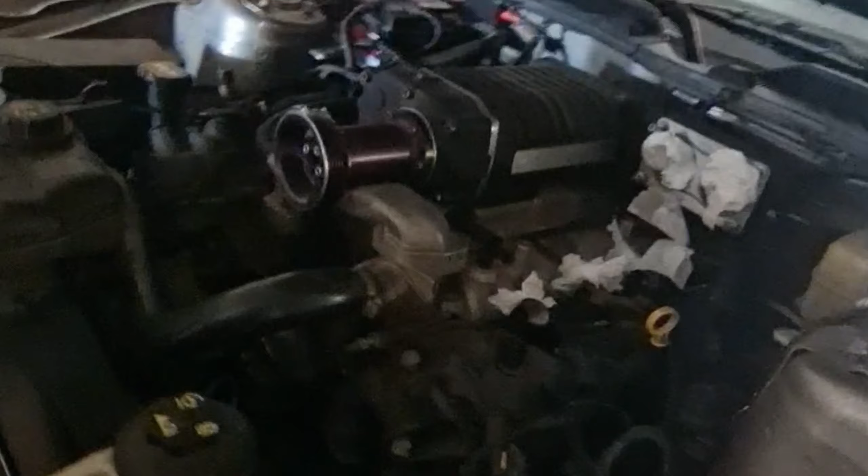Time to remove everything. No, no, no.

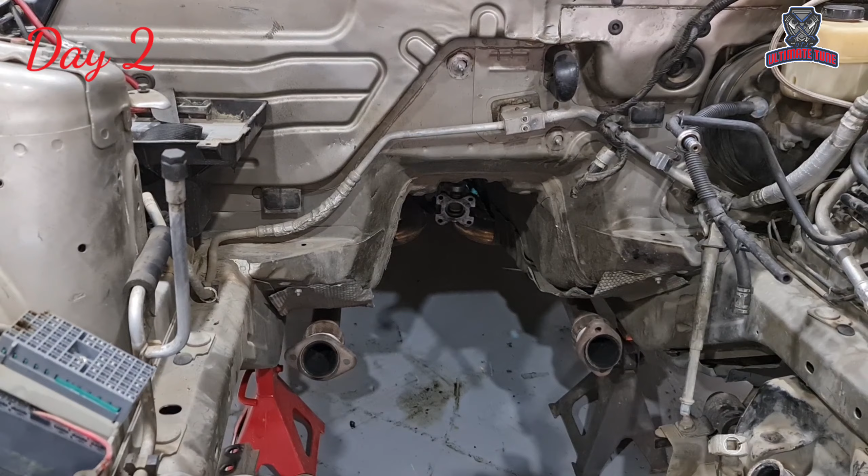Clearing out everything. It's gonna be a challenge with the gas line, with the AC line. But so far everything looks good. We have the interior dash completely taken out. Someone locked the door. It's all out. Here we have the engine.

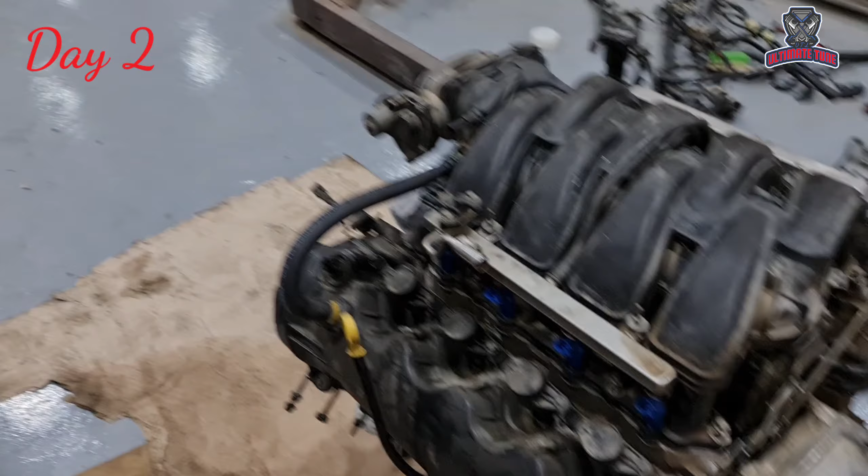Everything is under control. So this is the harness which is gonna fit in the car, and here's the old dash coming out. Of course the steering column shouldn't be taken out and we keep it in.

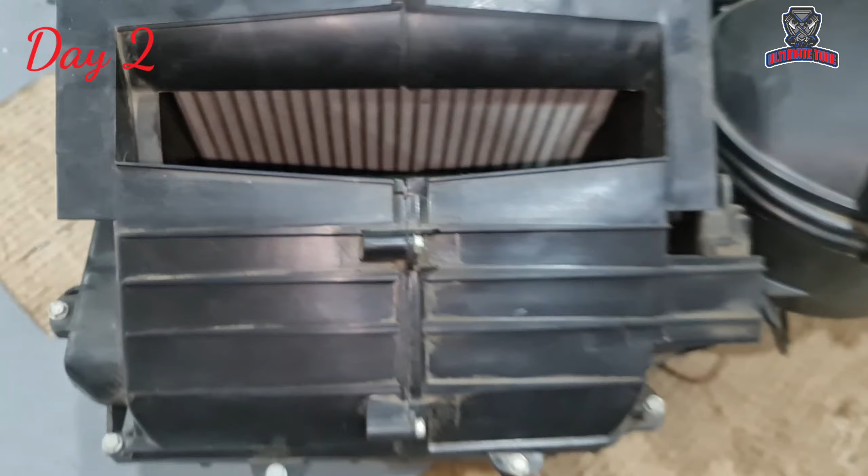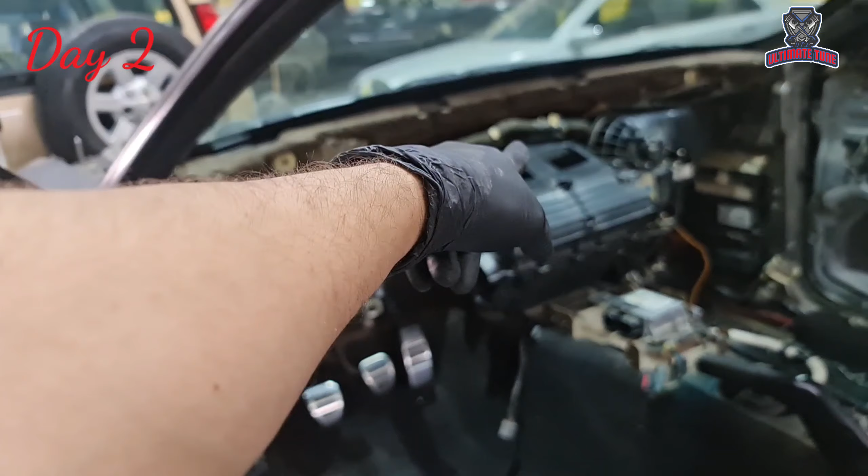So the throttle pedal fits perfectly. Of course, this is why you need the harness, because the plug is completely different from the 4.6 to the 5.0 Coyote engine. The cooling system should fit. Everything from the internal side is fine.

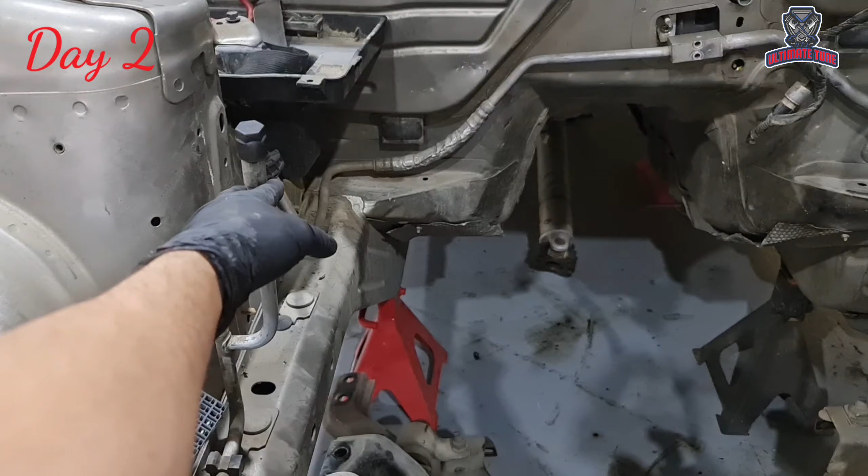Of course, this is where we remove the smart junction box, the body control, the harness, everything, and put the one from the Coyote. But from the outside, we have the challenge that this part is completely different. So I think we will need the piping from the other car, which is the Coyote 11 up.

And as of that, we might need to cut a little bit at this area, which is fine, because this area we can seal with something and then it's all good.

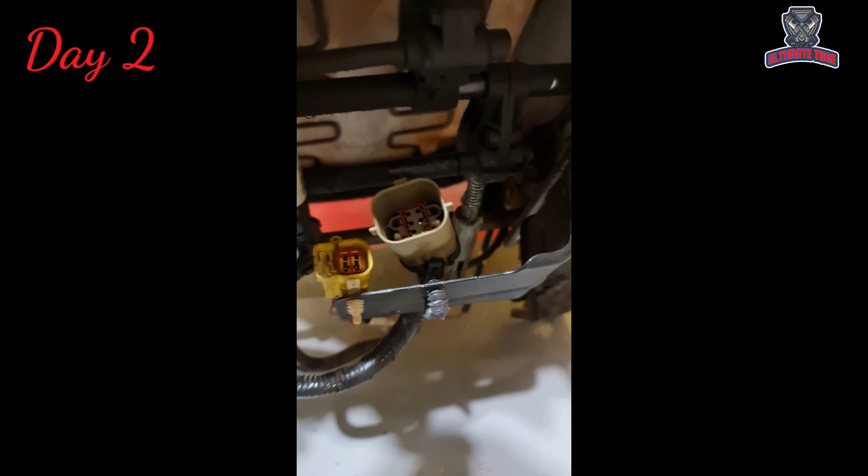So this is the driver's seat, and the main plug which fits on the main harness is different. So therefore you need to change the complete harness of the seat, which is not so complicated. All you need is the donor car seat, so you just take the harness from there. The passenger side is fine, you can just plug it and use it.

Look guys, the Mustang steering system is the easiest to turn. Look how easy it is. So smooth.

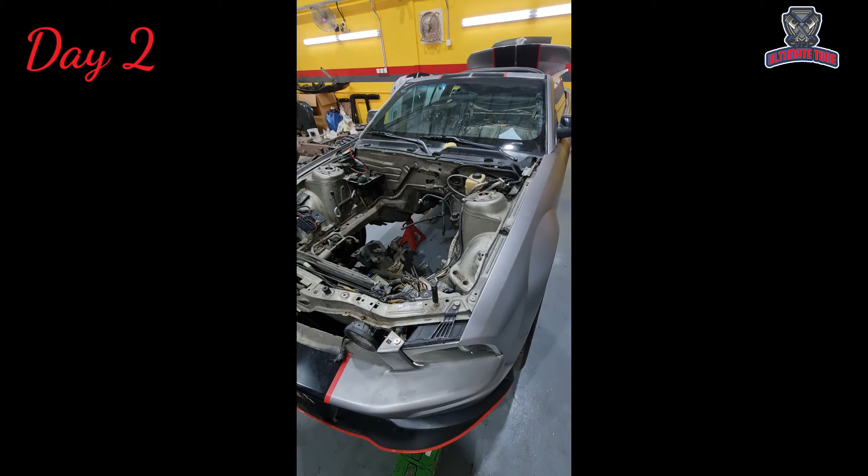There is nothing. So at this stage, yeah, the remote system, the most attractive thing in my Mustang. So many people ask me for that. Okay, remote start system is gone, new one is coming in.

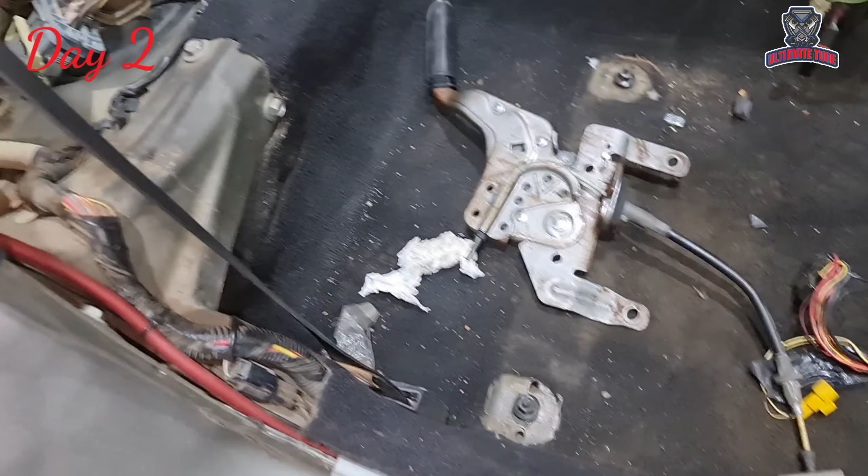So at this step now, we'll be taking off all the harnesses of this interior. It's gonna be all coming out all the way to the back, and then we put the new one after some care. I don't like to keep these things like that. I mean, even the original, you can see how it is, but I'll try my best to make it as good as new, better than new. This is the target, better than new.

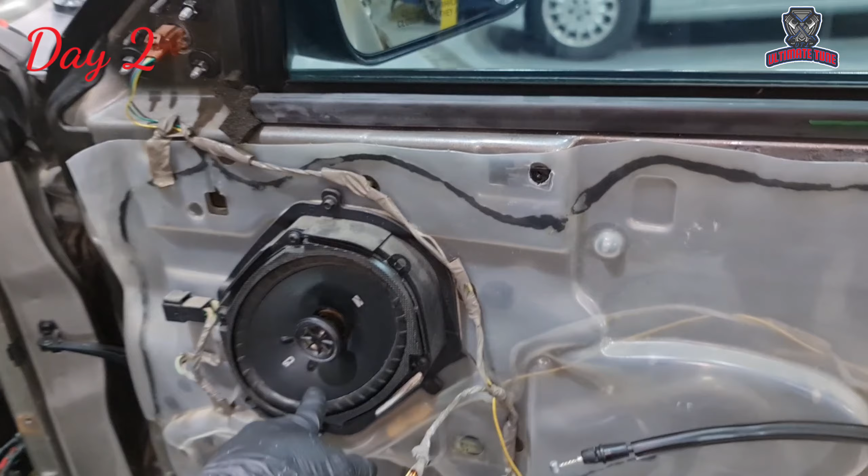Kickers, I love these speakers. They are so good.

Will it be possible to work with my Mustang without getting dirty? No way. Here's the progress. All the cables from the backside are out. Now we are coming to this stage. All the cables will come out, and then we will start with the new one.

Before going deep with the wiring and the harnesses and everything, I need to explain some important information about what I would call the nerve system of the Mustang, which is the harness and the different harnesses. There is an online website where you can find all the wiring diagrams and technical information for the Mustang S197, and for the S550 I already shared everything on my Dropbox link. This resource is very important for you to check and follow up.

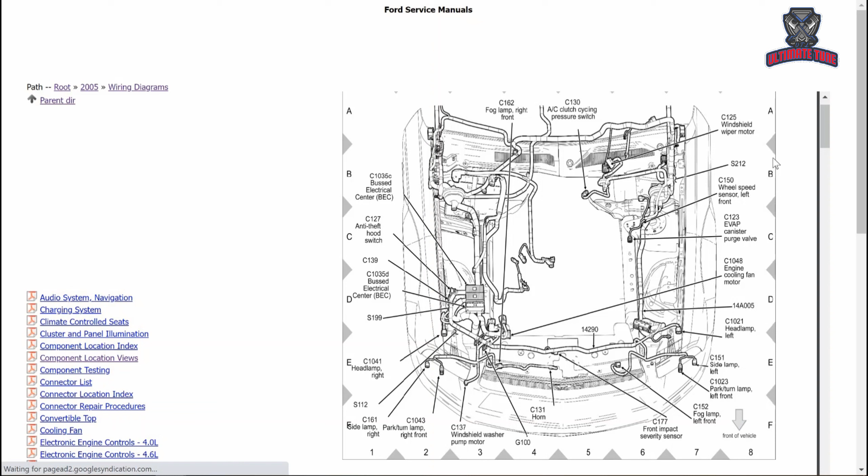For my own convenience, I'm using an offline copy of it, which I got used to. This is the older one and it has the same information. So 2005 up to 2009, there is one main harness. If you can see, this is the big one, which is going all the way from the fuse box in the engine bay all the way back to the tail light.

And then there are different small harnesses, for example for the engine, it depends on the engine you have, the transmission is also part of the engine, and then for the dash there is one, for the door there is one, door internal, and the tail light.

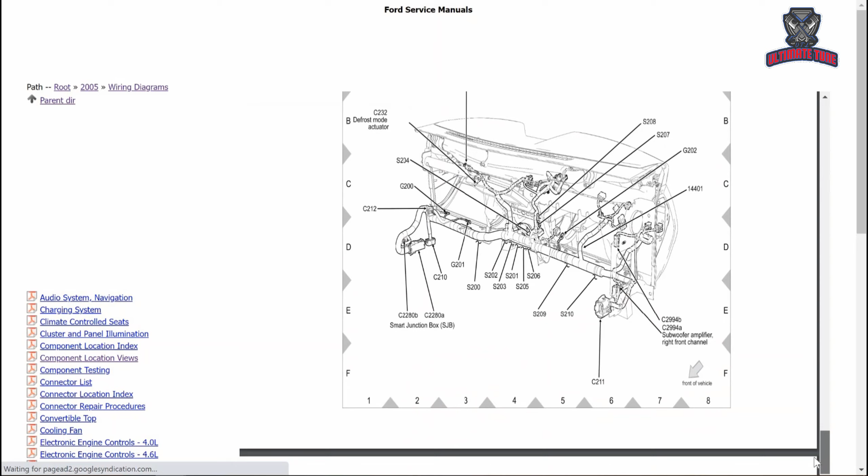As of 2010 and up to 2014, there are actually multiple different harnesses. This is an important difference, so you know how to deal with this. So for example, the fuse box comes with one harness, which is going inside to the smart junction box, and then covering all the way here for the headlight, for different components.

For example, for the MAF sensor, which is a little bit different on the S550, and then also for the ABS control, and then going all the way here to the dash from the driver's side, if I would say correctly.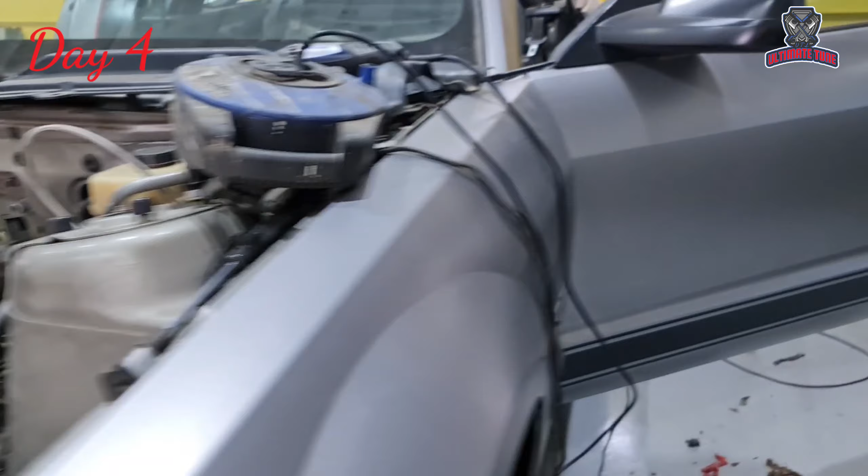Better than original, isn't it guys? As we know, this part needs to be modified. Now the modification, after studying the pipe diagram of the AC system, it's gonna be really easy, even easier than I thought.

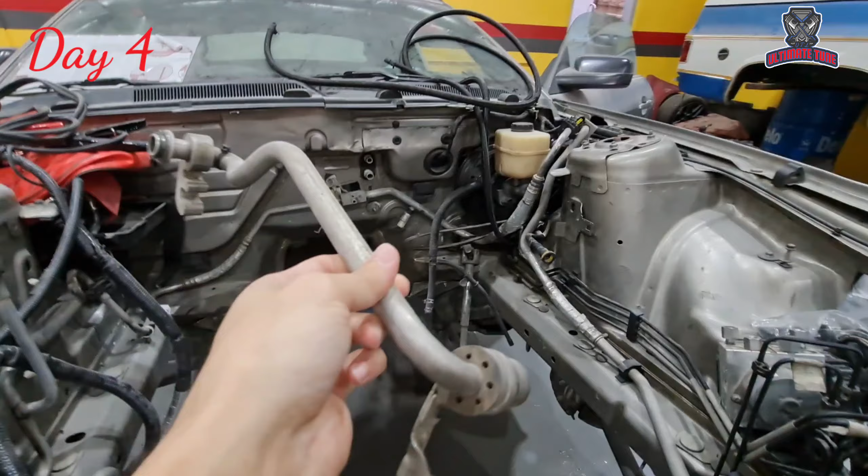So this is one side. I took this from the 2010 because it still has the storage container here. So 2011 and above, both lines go together on this side. So I don't want to change everything and then also change the AC radiator system.

So what I need is just the part of hosing. This will be cut and this sensor will be taken off, it's not needed. This pipe should be connected.

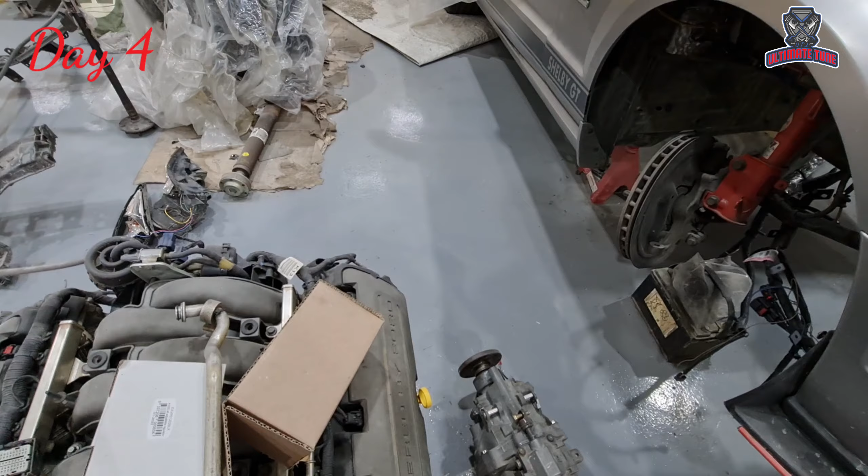And for the other side, I took this completely, but also I don't need it completely. I just need a small part where it fits in and then goes with this pipe.

The guys here in the workshop, they are good enough to do all this work, so everything is fine.

And then for the 5.0 to 2011 plus, here we have the transducer sensor, which is on the same correct line for the 5.0 2011 and above, but for our model it's here. Their model, it should be there at that side, even the plug is there.

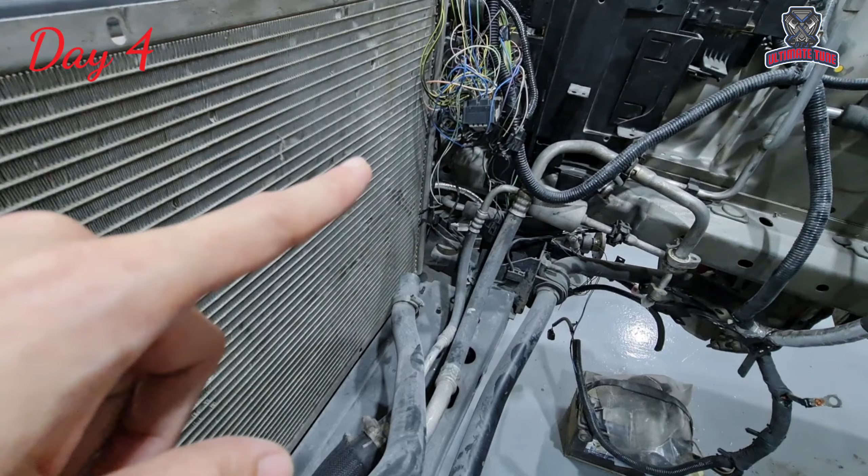So what I'm gonna do is extend that plug all the way here and then put the sensor here, because in the same pressure line, it's not different. And yeah, there is only one sensor, so that's the solution, and that's it.

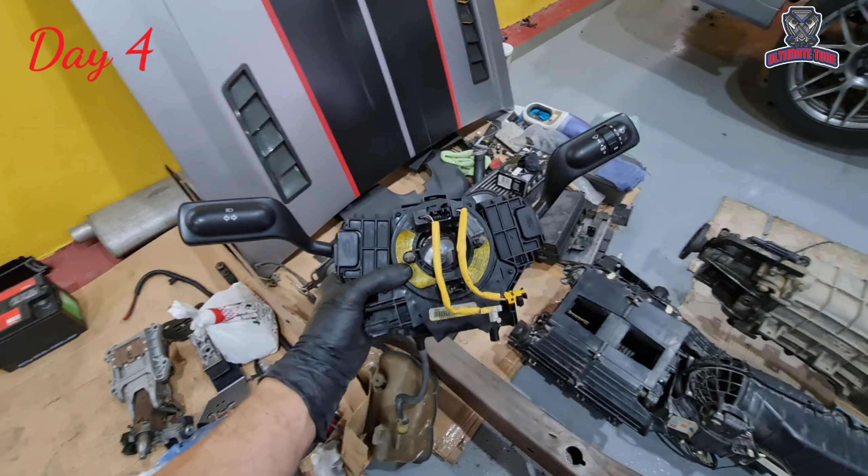Another thing to keep in mind, you want to change this because a few plugs don't match with the new dash. New dash means 2010 and up.

The steering column you can keep because you can keep it for your own key, for your own PATS system. This is the easiest, of course, unless you would like to change your keys. I have to, so no way. And then I'm just changing this one.

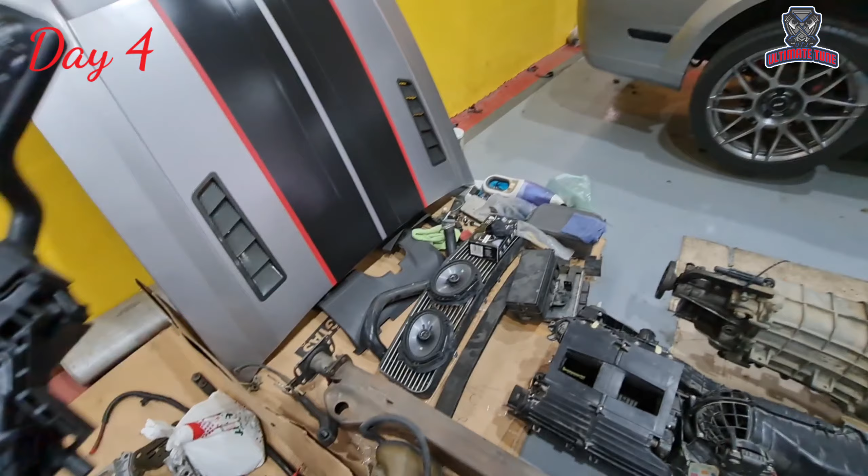Now the secret, where many people asked, how did I manage to get all the wires now, almost I could say 80% are done. How did I manage to put the Shelby steering wheel?

It's actually because the new one has a big plug here, up. Let's go to the light.

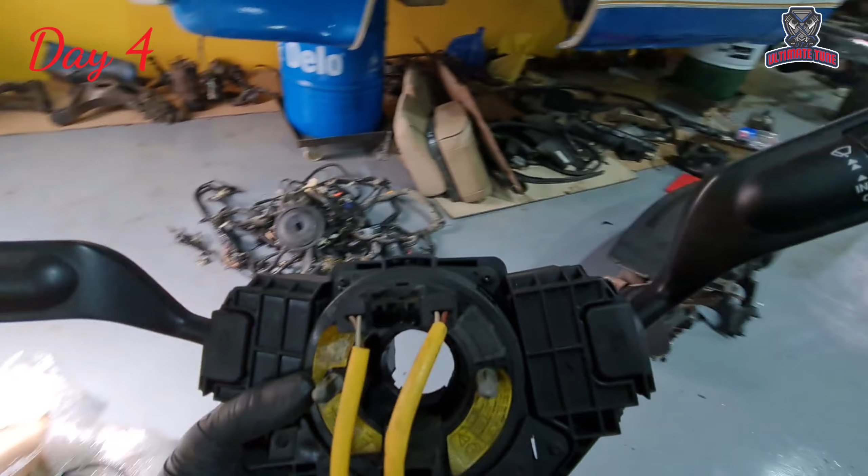Don't look at this. Some old classics, which is amazing. I'm not just saying old classic in a bad way, it's a good way. Yeah, anyhow.

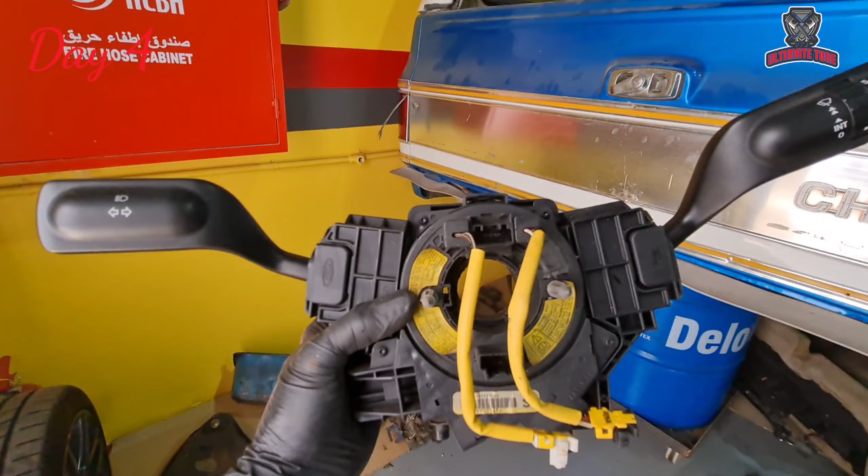This 3G is coming in a few years to be a classic, so now you know why I'm doing all this work, to keep my classic for the future.

So shortly, the upper plug which we have here is one row, and there is another one here which Ford doesn't use. And to use that, you need this plug.

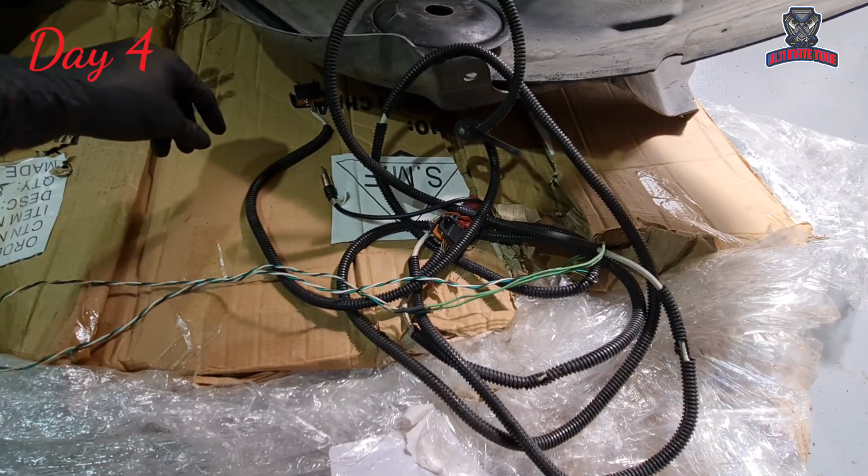You just need this plug, and hopefully you can read the number. Come on, focus. You can see the number. Oh my god, this is too much zoomed in.

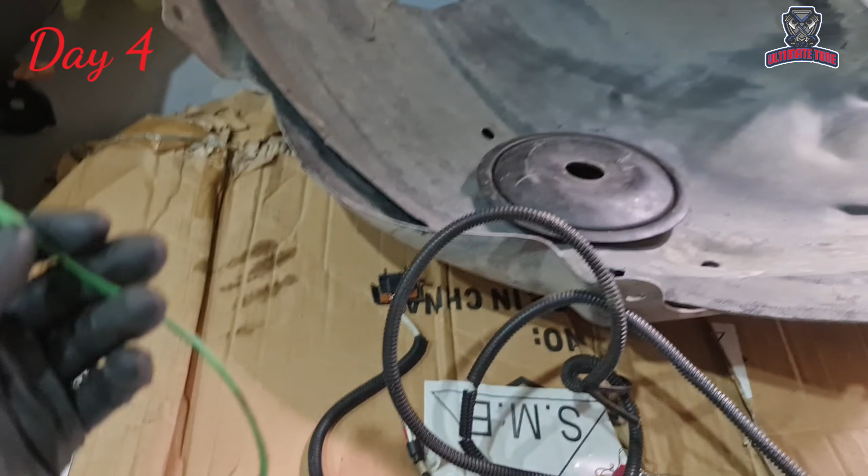Hopefully it's clear, you can find it on the internet or in my Instagram post. Check it, talk to me, I can share with you the part number of this.

Anyhow, you plug this interior one, and then the heading second port, it's here. So you can see this is the second one. So it's communication from the lower one, from the inner one to the lower one, and then to the sound system. So yeah, that was the small trick I did.

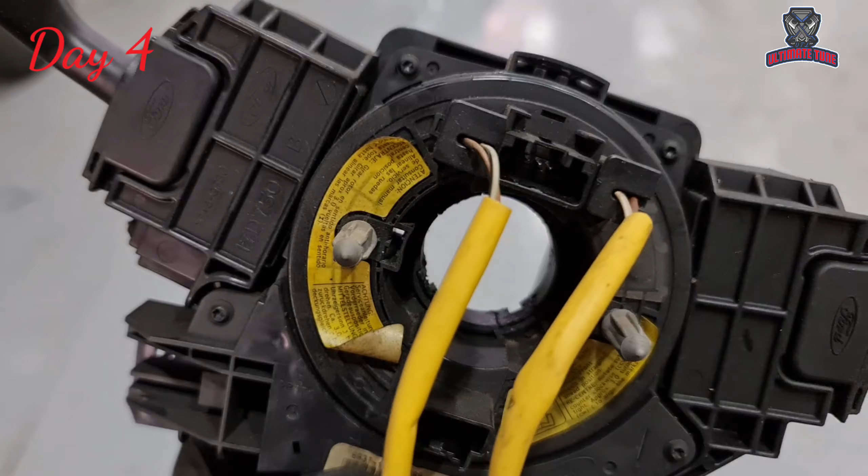So this will be changed. Of course, when changing this, you need to change the cover, because the new one has only left arm, left multifunction control arm, not two sides. So you need to close the other one.

Keep on working. Here's a little story about a hunter guy, he used to be the owner of this Mustang. Imported, and since the beginning - this is not yet my footprint, guys - there was always a noise under my seat about things scrubbing left and right.

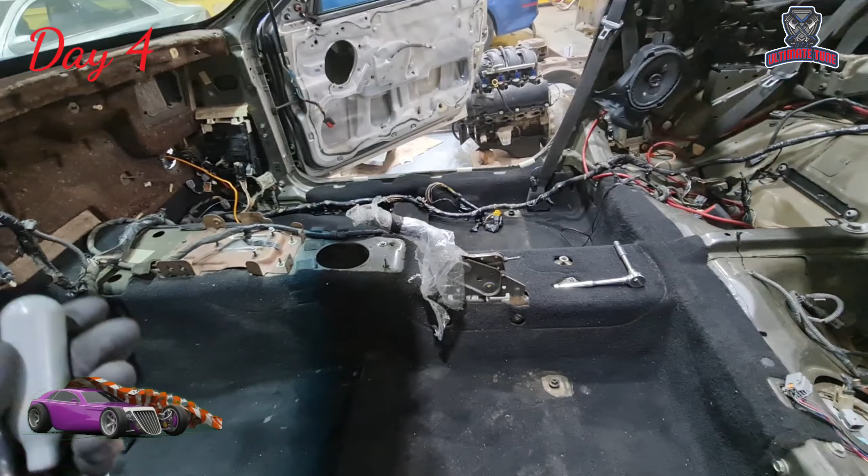So when I bought it, I started discovering, I put a magnetic and started pulling these small pipes, and I found like 40 pieces. Now, after more than 8 years - is it 8? Almost 10 years. Almost 10 years. Yeah, 8 years exactly, yeah. So it was 8 years.

I found another 2, it was exactly under this area. Crazy! Now you know why there is a footprint here.

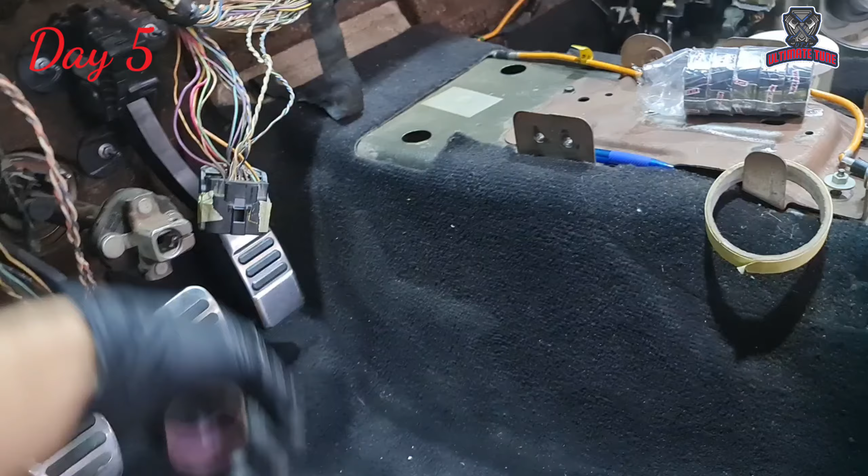What I did is because I wanted to reach the best cables in the market. And it's working fine, all is good, except that this harness is the old build from Ford, and this one is the new build from Ford.

So the new build, the cables come here, and it should somehow go all the way there. Or for the old build, this cable should go all the way up to meet this one.

So I already checked the diagrams and found these wires match completely. This is C263, and this is both C264 and C265. So some cables from here and here match, based on the diagrams, not my guessing. The rest I'm still trying to find in the diagrams, because it looks like these are data cables which I can't find here. So I have to finalize that, and then there's another thing which I found does not match.

Let's talk about it, it's not a big deal, but it's 99% - this cable is for the horn, which is here, but it's a different plug. This is 99% because it came from this side, which based on the diagrams I have to be sure about.

Once I do this video, I will be keeping comments about these details.

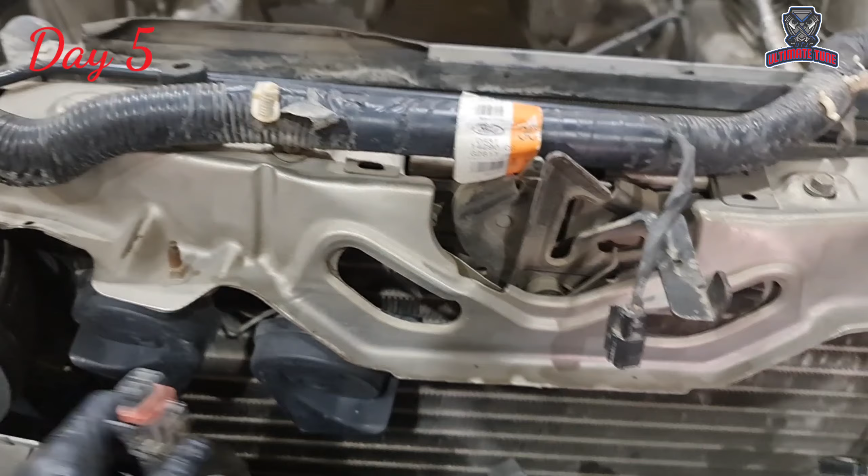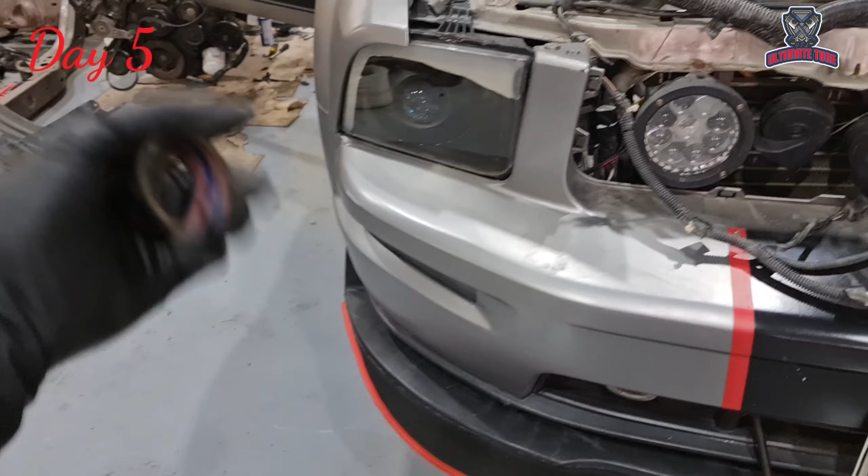Another thing in this area - of course you need to work on these blocks, because the light system is completely different, not the fog light but everything else. So the lower and the upper are absolutely not the same. So the headlights here are these two kinds of plugs. So what you need is either to have the old one, just cut it and bring it back, or if you change the plug style at the bulb, then this is your choice.

Of course it's no big deal for me here, because I know this is a xenon system. Since I have a custom headlight, I will be using the xenon modules with what we call in my market that yellow cable - we call it a cut-out system. So I have a relay and connections. I will be using not this one, but a different kit which matches the one from Ford.

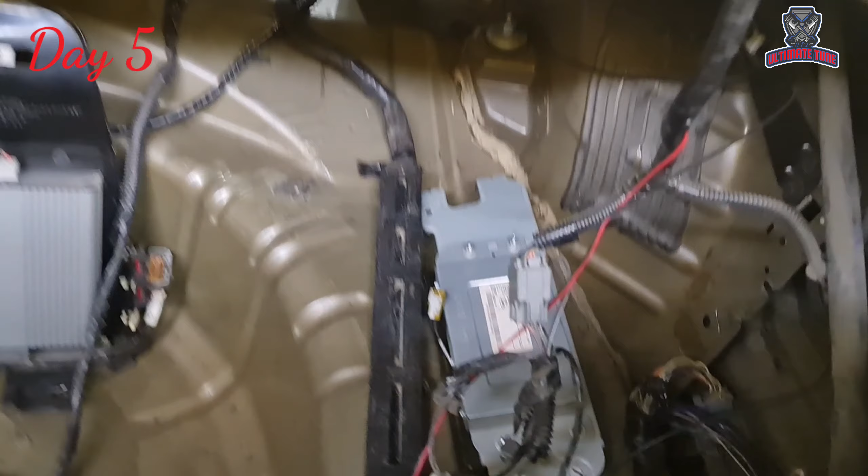That is it - no, that is not it. Let's go back, there is a challenge. Now, the harness I brought surprisingly does not support Shaker 1000. Even my car did not support that in the beginning, but it was there - the plug was there, I just used it. But this one does not offer it at all.

So either I'm gonna go with the aftermarket amplifier, which I saw lots of people doing, and then make my own connections, which is no big deal.

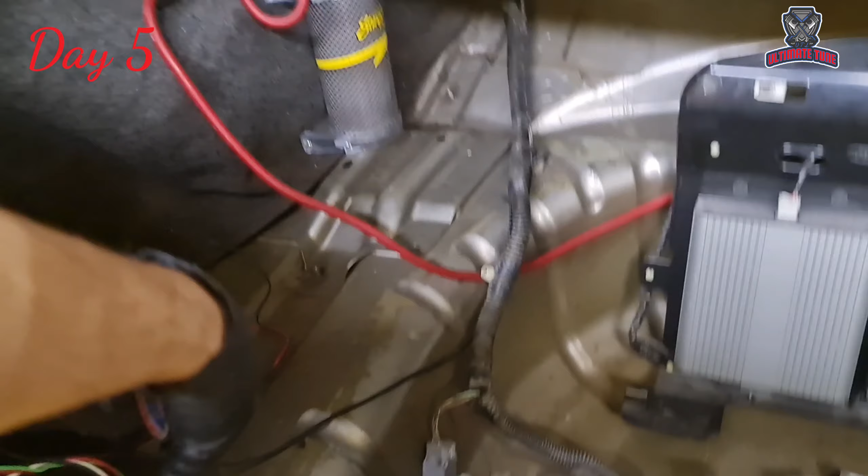This is the tail light plug. For much more details on the tail light connection, please refer to the previous video in this playlist on how to build a custom tail light with RGB. That part explains exactly which wires, how to connect it, and what additional things you need to do. In this part, things were at an earlier stage, so it wasn't as clear. Hopefully you can benefit from that as well.

And hopefully you enjoy the rest of this video. All the best. For some reason, I can maybe double check the harness of the...

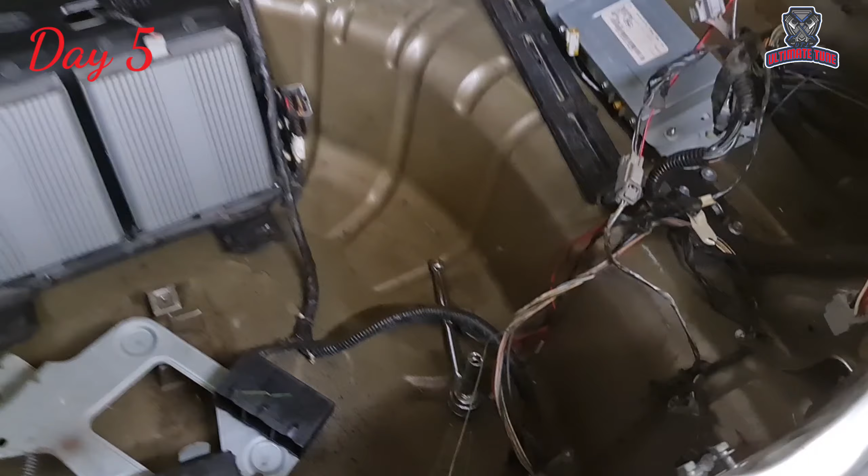Where is the other plug? I have to double check where the other plug is. Anyhow, I'm just wondering that this plug has more wires than the other side. So I'm missing 1, 2, 3. Either there's a harness from this one which I did not see in the diagrams, so I have to look at the car which I got this harness from, and then be sure. Yep, that is all.

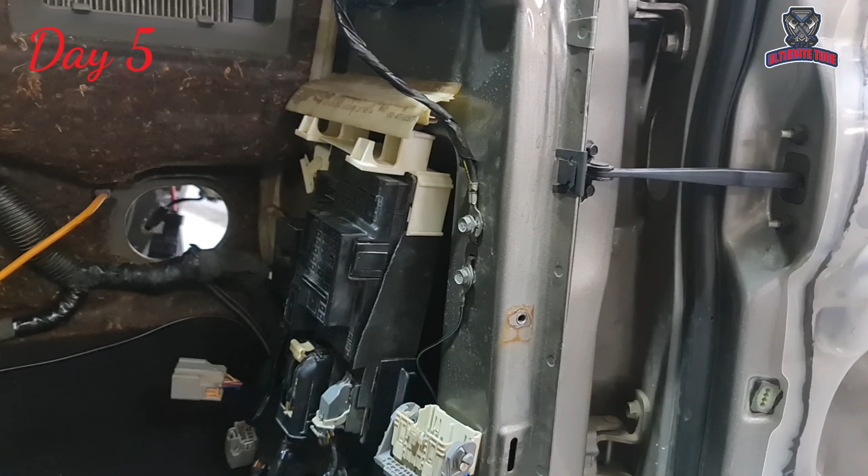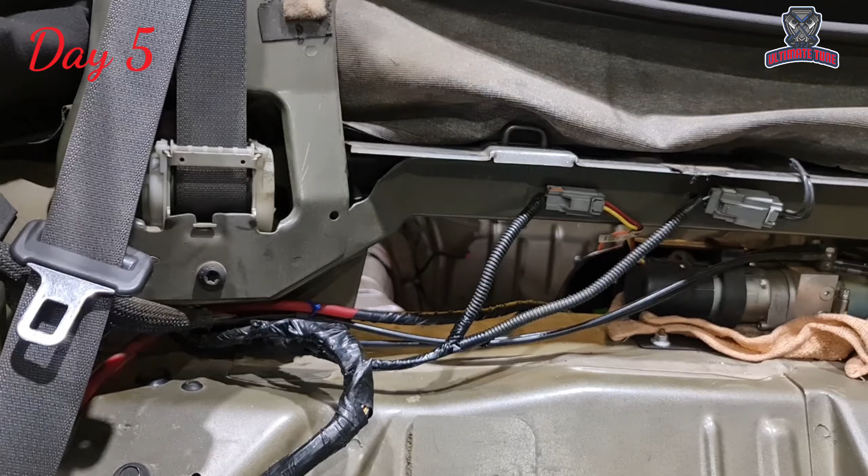So today we are done with the right side. These two are from the front fuse box, and everything here is as original. This will be drilled back for the kick panel. It's all like new, better than original. The convertible, everything is done, it's all the way back here.

Wait a minute, oh yeah, I need to put these back. So the body control will need to be fixed, and the tail light will need to be corrected. I think that is most of these things here, and it's all good.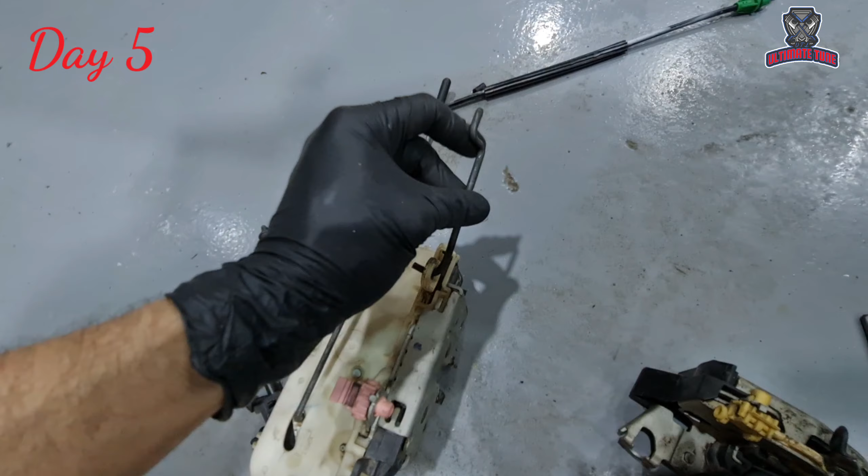The rods which actually hook to the handle are different thickness and also different length, so it's easy. You can see it attached to the yellow part, that one. So it's just a hook, but then you need the one which is coming with these.

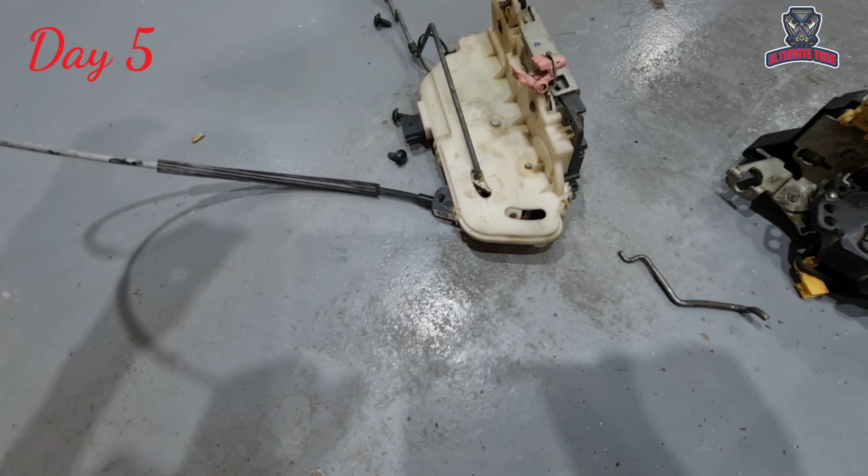The door handle also has different length, different system, so you need this, which is usually attached to it, so better use that one. And then the last part, which is also related to this, when you install it in the correct direction, with our door open area, it's usually all the way to the glue area, so you can't actually push further.

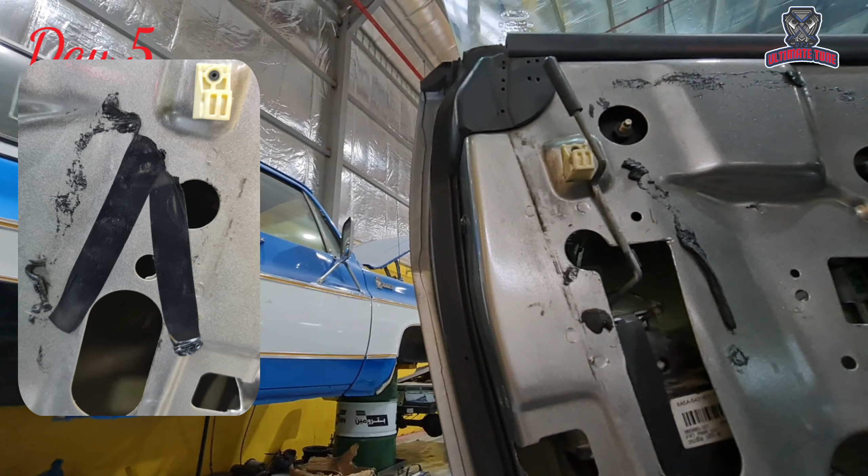You need to cut it like this or a different shape, whatever makes you comfortable. And then your center point is the small dot, because that is where the yellow holder will be fixed to it, and then you can go up and down without any issues, and then everything will be perfect. This is all for the door latch system.

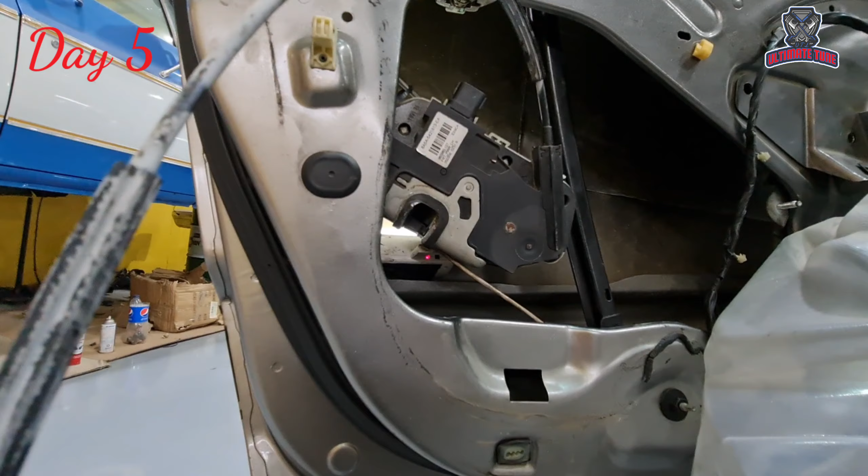Once you change the door harness, which you need because of the computers from the motor, this is another video part we will do. Once you change the motor, the plug will not fit and the computer functions, the wiring is completely different. This you could manage, but I thought, okay, let's finish it, make it perfect and change everything. So this is the total work you need to do for the door latch to be better than original. This will be completely sealed again.

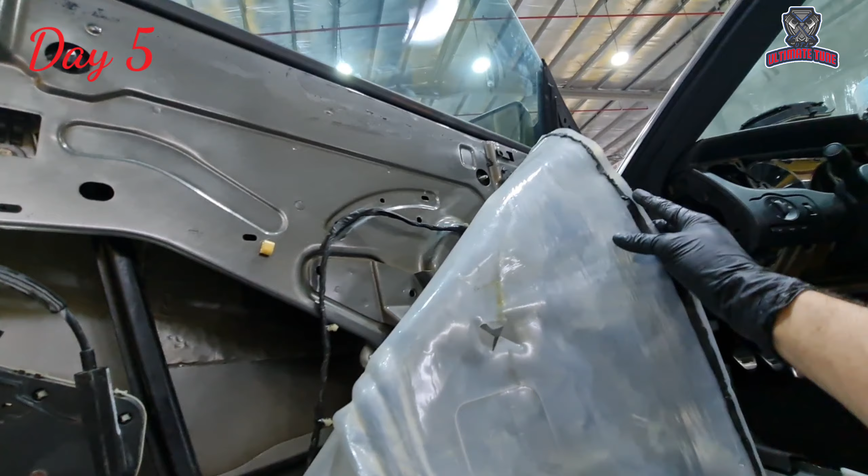I found that this is a really easy thing. You don't need to kill yourself for it. There is a tape you can buy, just open the tape, put a new one and stick it to the door, and then everything is done. So don't be so worried when you open this, whether it attaches back or not. You just put a new one. Make it as perfect as you can, better than original.

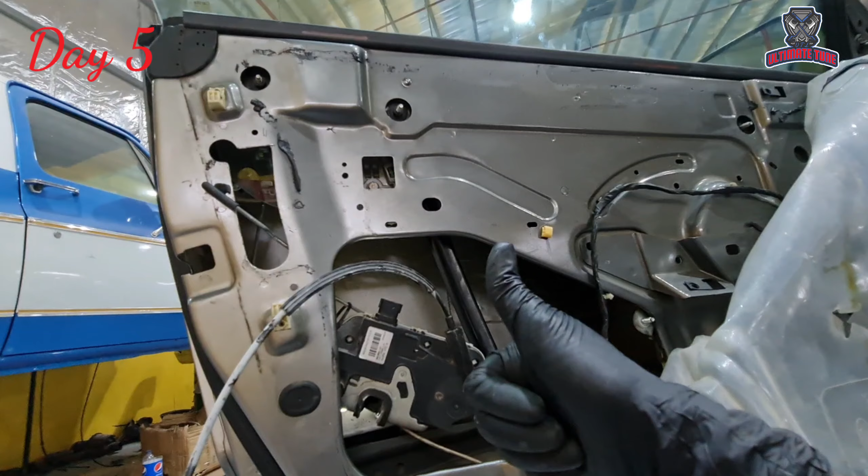Since the harness of the door was completely changed, you need to change the motor of the window for the driver and the passenger side. The new one matched the thread, it matched the diameter. This shaft is a bit longer on the old one, shorter on the new one, which is no big deal because this just passes the metal anyhow, and there is more thickness here which we don't have here.

The small challenge is that there is a metal, I don't know what you call this. It's responsible so when you tighten with the screw, you don't press on the plastic, but the new one is actually threaded plastic. So you would need to open this hole, make it bigger, put this part on it, and then fix with the original screw from your car. It should be good. Then we do it and we test the window.

Simply, you just need to push this from the other direction. Just put something of the same diameter, hammer it smoothly. You don't need to go crazy, and then it will go out like this, and then pull it with anything. So the passenger side is done. The window is working perfectly with the new switches.

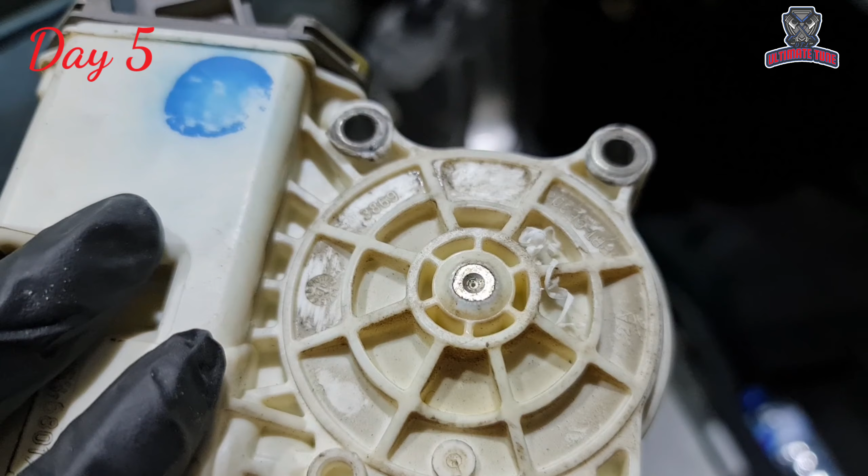What I did, I drilled it, but then I kept it like a hair thickness, and then a little bit of heating, so it's actually fully melted with the plastic. And then I trimmed, because the edge here is a bit long, we don't need this length, so I just trimmed it and it fits perfectly.

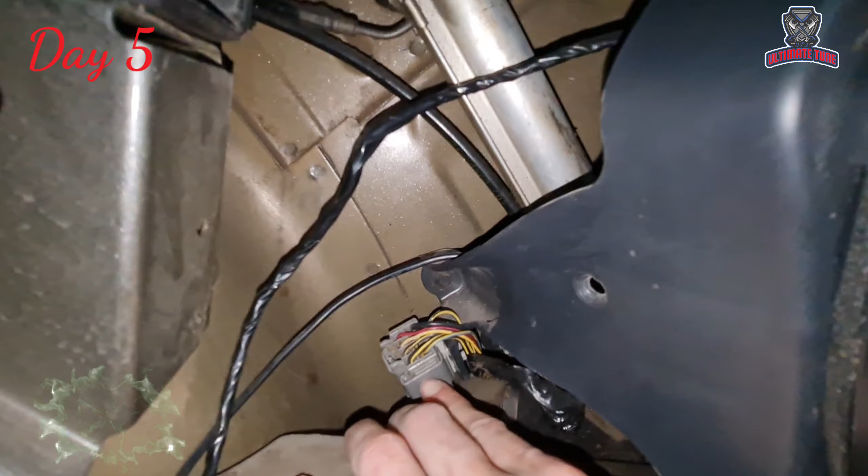All is good there. Regarding the rear window, which is from the convertible, if you plug everything, the plug just fits perfectly, but the wiring is completely different. You can see it. The position of the wiring is different. It's not that you need to change the harness and the motor. This is very nice. This is very lucky. I just changed the position of the pins, and key on. Ta-da! It works perfectly.

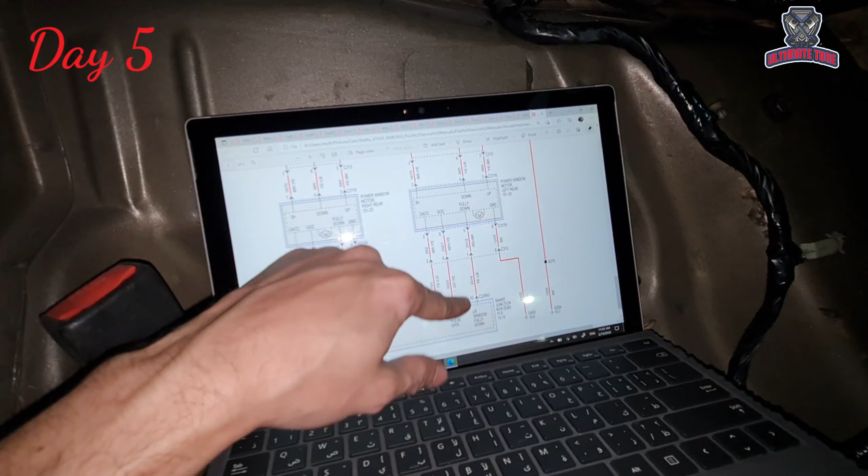Now you need to look at this position, because this is the one related, not these. Don't be confused. These at the motor and these at this point. So position number 1 was different, position number 6, number 3, oh no, 3 was the same, number 4 and 7. Now don't take this as my word. Follow the diagram, check each one up and down, positive, power window, check every one and just compare the two diagrams and it will be easy peasy.